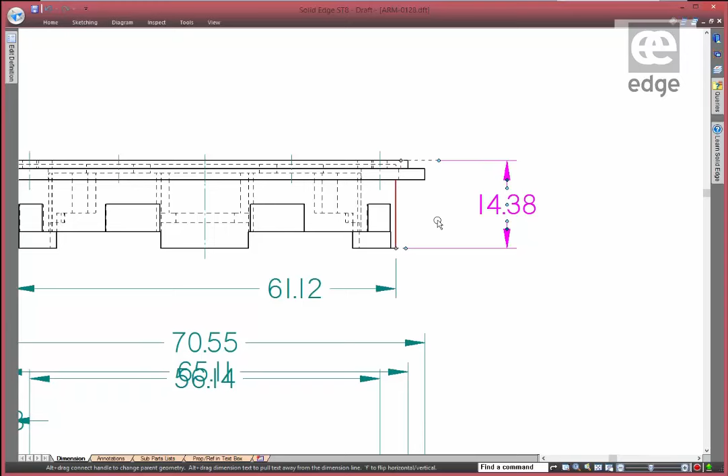Notice when we select a dimension, we have 3 different handles. This handle allows us to extend the dimension extension lines. Notice that the dimension is off-center, but when we start to drag it, it will snap into the center location right there. With these handles, we can increase the gap around the dimension.

Center handle allows us to quickly move a dimension, like this one here. We pick up the center handle there. Even though it's hidden behind there, we can move that down. If we insert a jog into dimensions, when we're taking it out, you'll notice it snaps to the non-jog position, which removes the jog.

Here, all we need to do is move this dimension down and across.

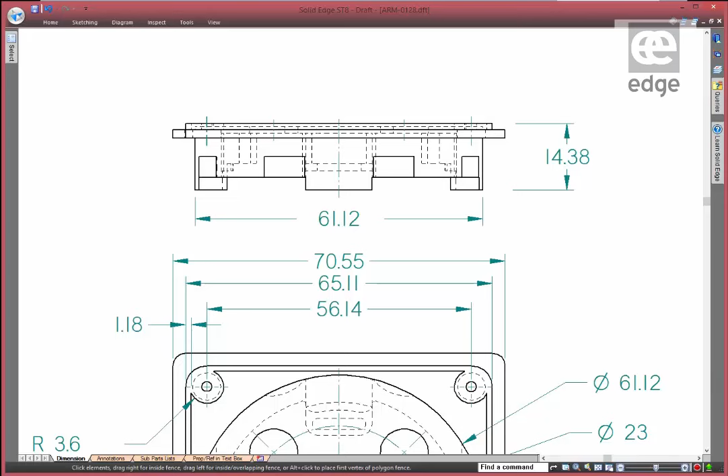Diameter dimensions also have these handles. If we drag the dimension handle, this will just simply move the dimension. Dragging the handle on the break will move the dimension side to side and extend the length of the break without going to the properties.

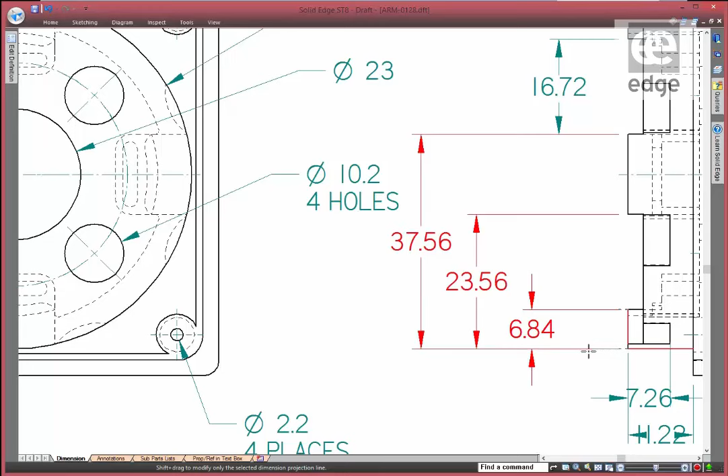Notice that when we highlight all 3 of these dimensions, they share one common extension line. Moving the extension back not only moves the selected dimension, but moves the 2 extension lines at the same time. This is great.

This dimension can stay, it needs to move out, but this dimension can stay in the middle, and the arrows need to be flipped out. Notice we can do the flip. And again, we can change the arrow head style. Watch this. Wow. Turning on and off extension lines has been improved, so no more property box for that one.

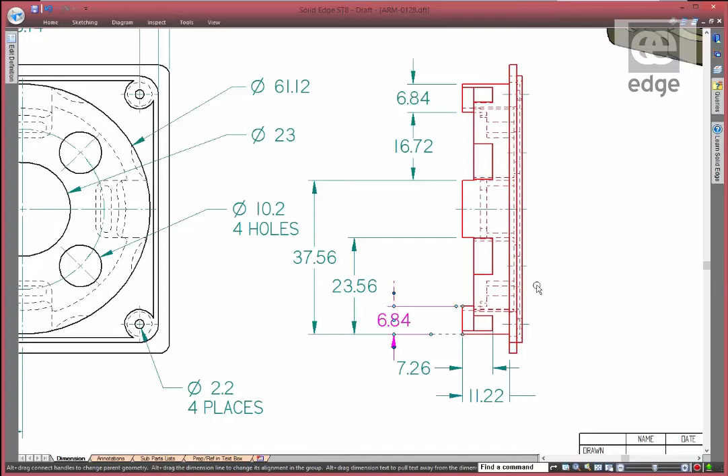Annotations have the same types of modifying handles as dimensions. Let's take a look. The center handle on the finish symbol moves the symbol around. Midpoint handle flips the side of the symbol is located on, and the end handle extends the length of the break line.

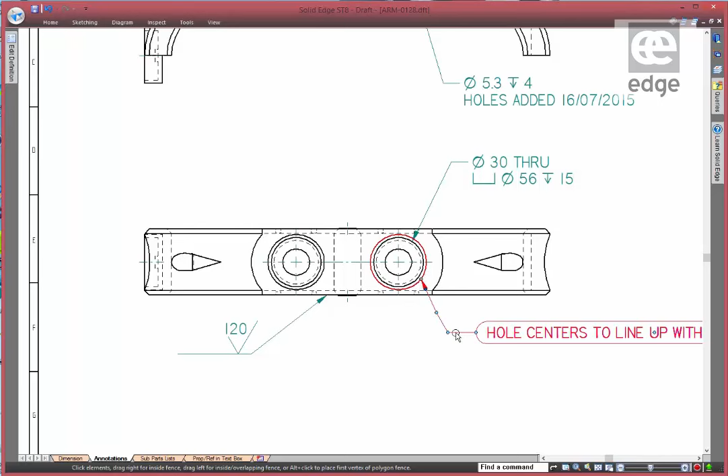Balloons work in the same way, but notice when we start moving the balloon, we get this indicator to locate in 45-degree increments. Moving a break, you'll get the indicator at the break, and moving the break itself displays the indicator at the arrowhead and break line.

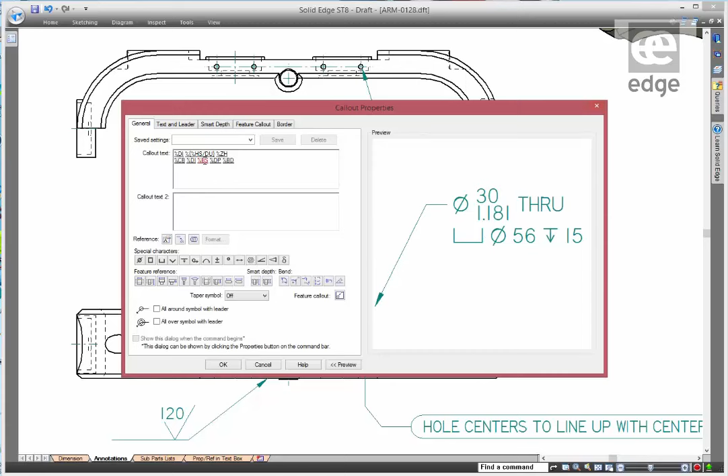Knowing the correct syntax or Unicode has been a challenge in the past with Solid Edge. With hole definitions, we can now add things like dual units without knowing what the syntax should be, or add rounding in a simple drop-down.

Here we're rounding to 3 decimal places.

On this dimension, we want to add some tolerance to the dimension with upper and lower limits. This dimension has a date. With the Format command, we can choose from different ways to display this date.

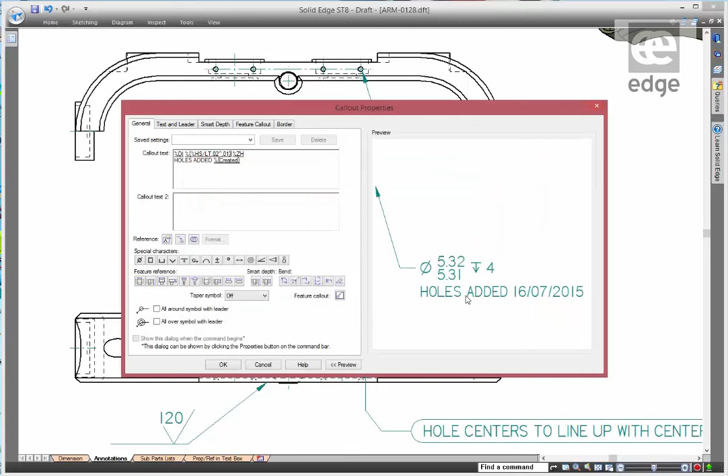Notice how the day and the month are in lowercase. We have options to control this. Very nice.

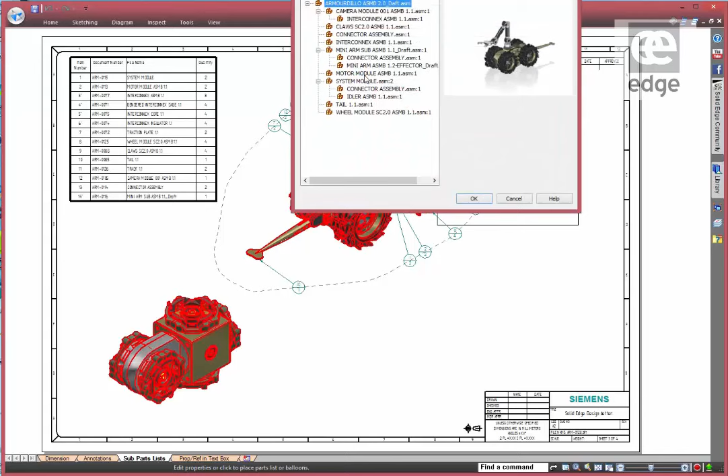New to Solid Edge ST8 is the ability to have a parts list of a subassembly on the same sheet as the top level assembly, and the subassembly has its own unique item numbers and balloons. Just that quick and easy to have a parts list of a subassembly.

Solid Edge has the ability to link reference text together, like here with these symbols. We change it to BB and we notice it changes down there.

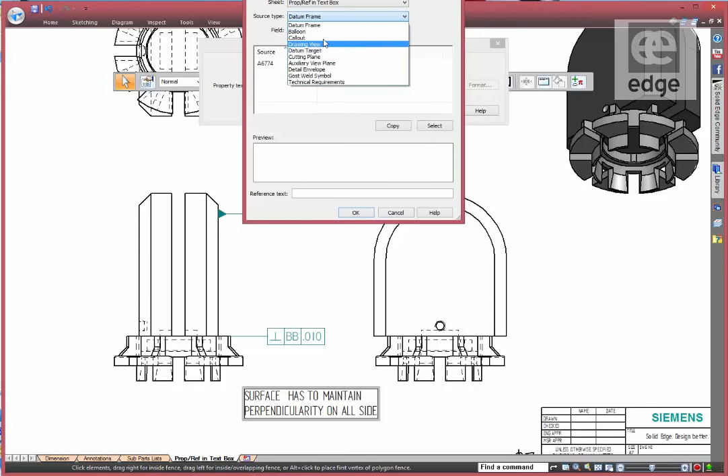Solid Edge can also link to a callout with either a property text or a reference text, and when the symbol is changed, it updates the callout. Let's see how that works. We want to change a datum frame. We pick up the source of that datum frame, the BB, and we insert it into the text. And when we change, everything updates. Very nice indeed.

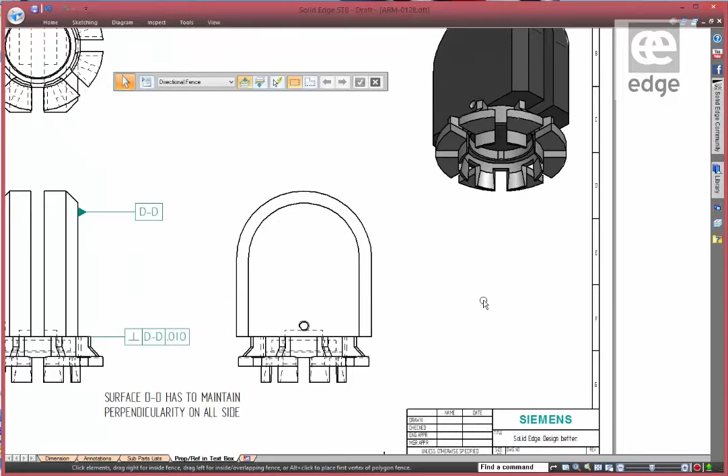Next, we'll add a new type of callout called technical requirements. Technical requirements are those special notes that we add to a drawing as a numbered list, with numbers or Roman numerals, to point out specific details about a drawing.

I'm going to put in 3 lines of text here, and you see as I insert each one it puts a number alongside it, and we can change the numbering style into almost infinite variables. And finally, the last one.

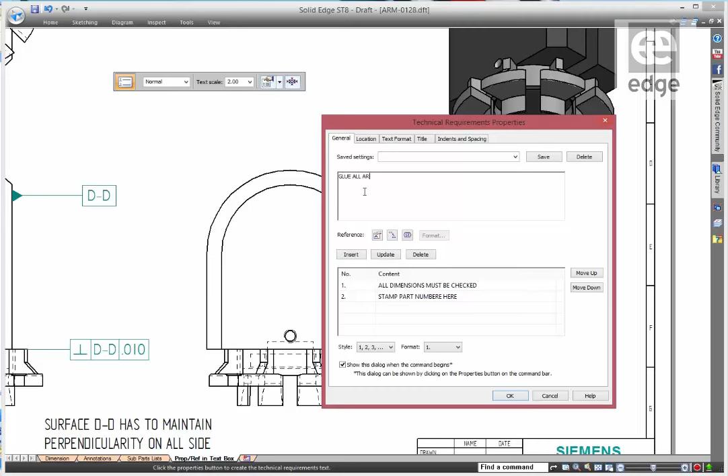Next we'll place this technical requirements text on the drawing, and we'll create a call-out, and we'll link the call-out to the technical requirements.

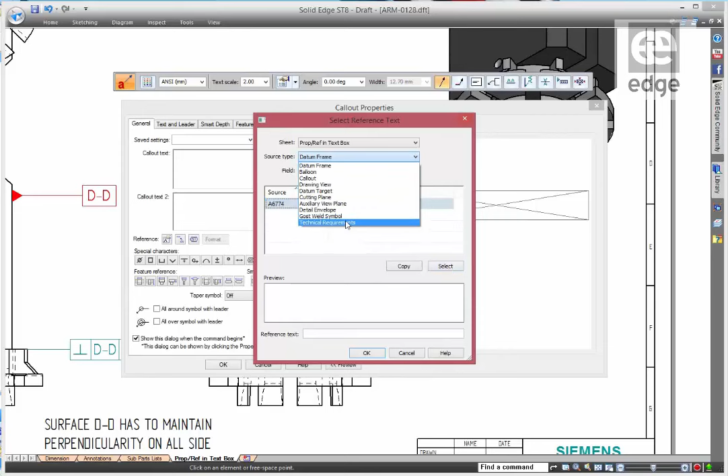We go down, find technical requirements in the list, pick out the one we want. Okay, I'm going to modify this note. See note 2. Very simple.

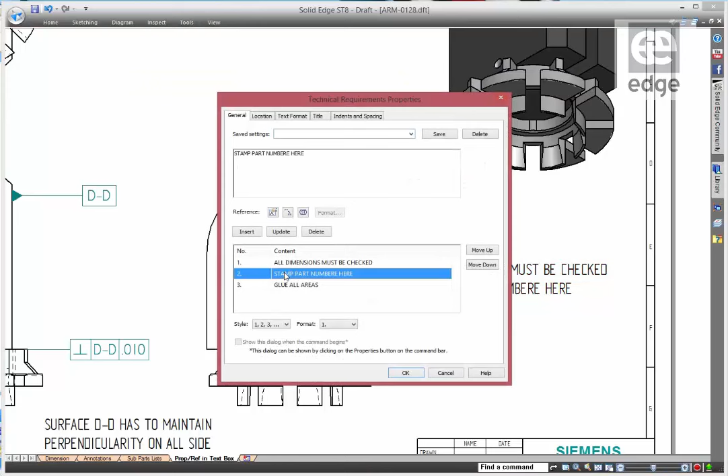Linking reference properties to the technical requirement is quick and easy. We do this to ensure that if the note changes, then the call-out will also update, just like that.

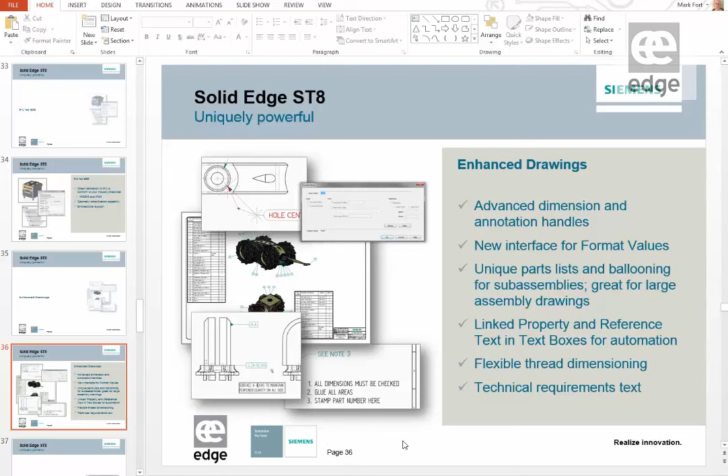2D drawings are a very important part of the design process. SolidEdge's uniquely powerful 2D drafting software continues to incorporate powerful tools to get the job done with amazing user experience.

When working in a design team, there are times someone could make design changes to a model file and never think about the manufacturing drawing. Then somebody opens a drawing and notices it's out of date. When this happens, there really isn't a good way to know what's been changed.

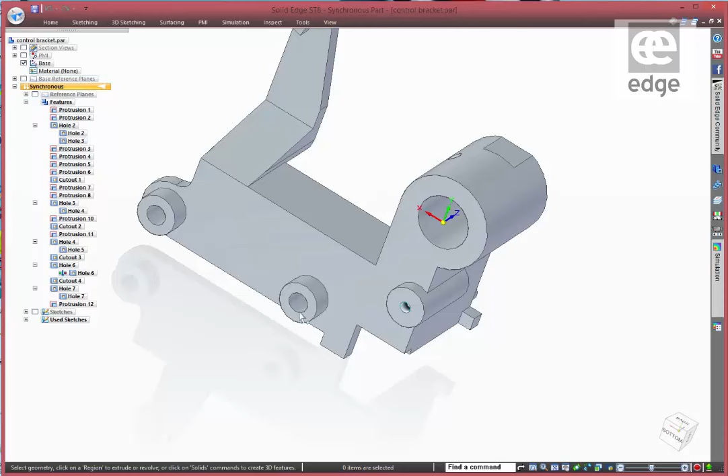SolidEdge ST8 has a tool called Drawing Compare. Let's see what's been changed in this model by comparing 2 different draft files of the same model. Let's see how this works.

We make some changes to the model, to the underlying model, and move the boss, and we'll move this face out a little bit.

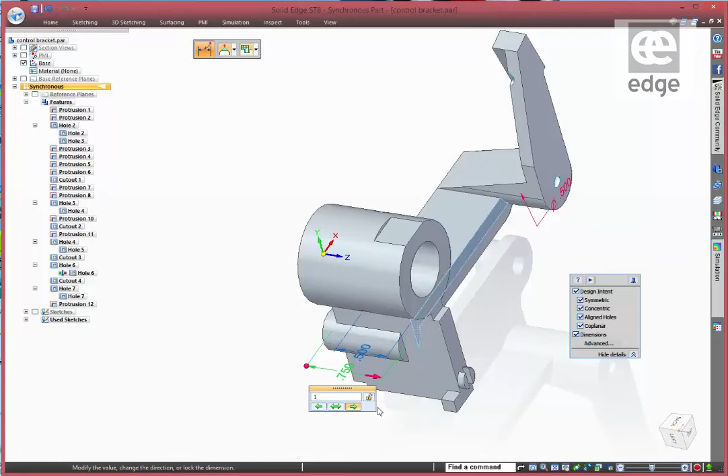Now let's look at the drawing of this model. That'll need updating, of course. Update all the views, and there's been some changes. At this point we need to save the drawing, and I'll save it under a new name so that we don't overwrite the original drawing.

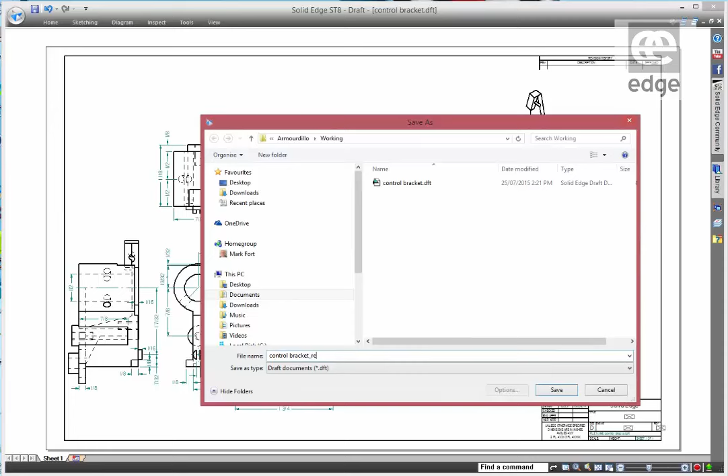Now let's compare these 2 drawings, and this is my favourite - Compare Drawings under the Start menu. It's a new menu there, and we simply browse to the original file, open that. File 2 is our changed file, or our revision file, and we just press the Compare button, and it builds a compare file.

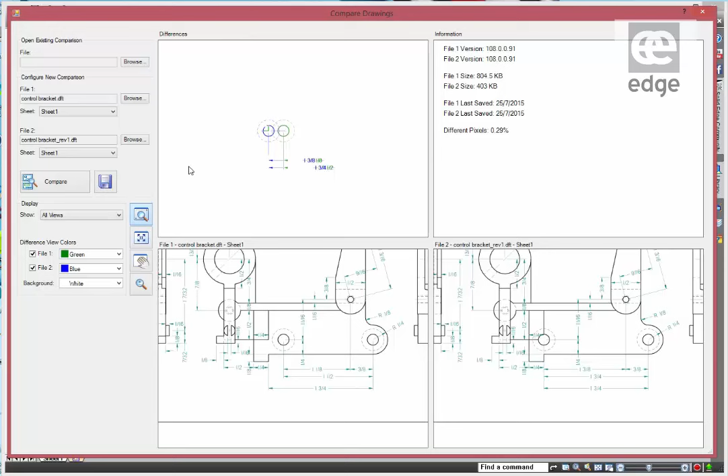We can save this and use it later, but right now we're just going to zoom in to an area, and you see all 3 views update. The green, of course, is the original, and blue is the new file. We can see the changes there.

We can zoom in and out, we can refit, we'll zoom up in another area. Just take a look at this back plate here. We can see the changes up on the top left, and the original and the changes down on the bottom panes.

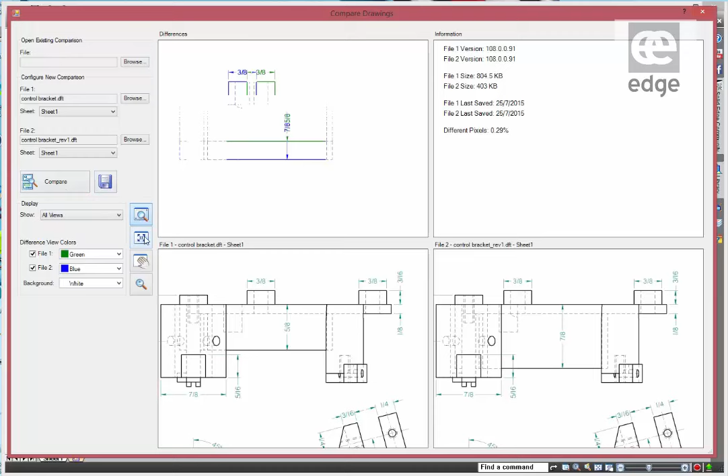We're going to save this compare. We can save this as a file name, and it's a BMP file, so we can open this later on to have a look at this without having to open the original files.

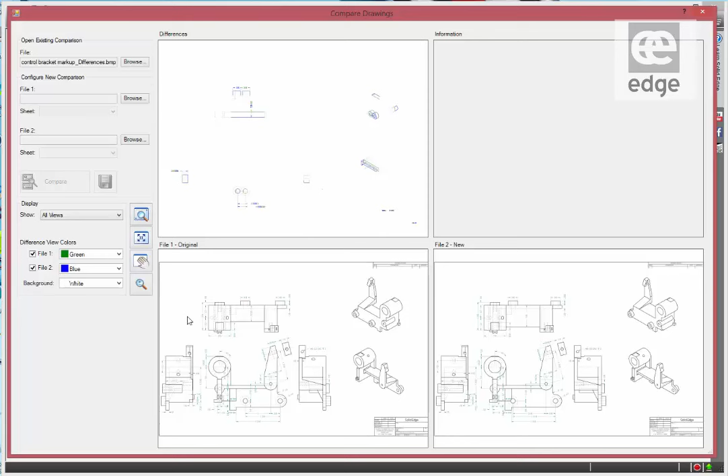Okay, get back into the Drawing Compare, and we can browse for that file that we just made. In fact, I think it's an earlier one I just opened then, but... and we can compare the changes. This is quite useful, and I think it's going to be a great tool.

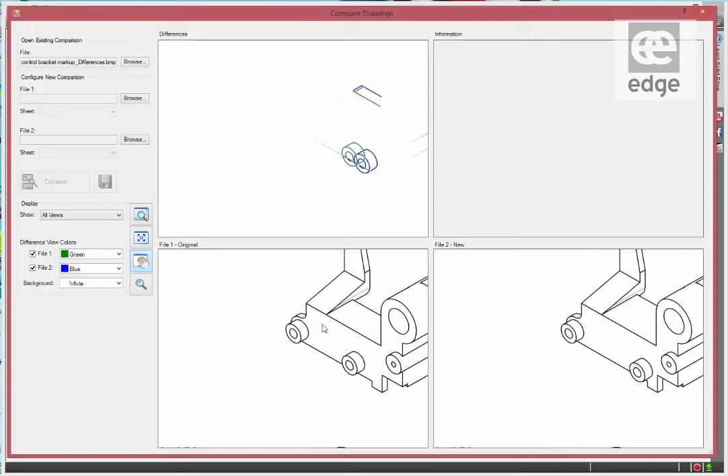The Drawing Compare tool is a quick and easy way to ensure our changes are the correct changes. Drawing and part model are up to date, and the changes are correct for our design. I think everybody will agree that this is going to be a very useful tool.